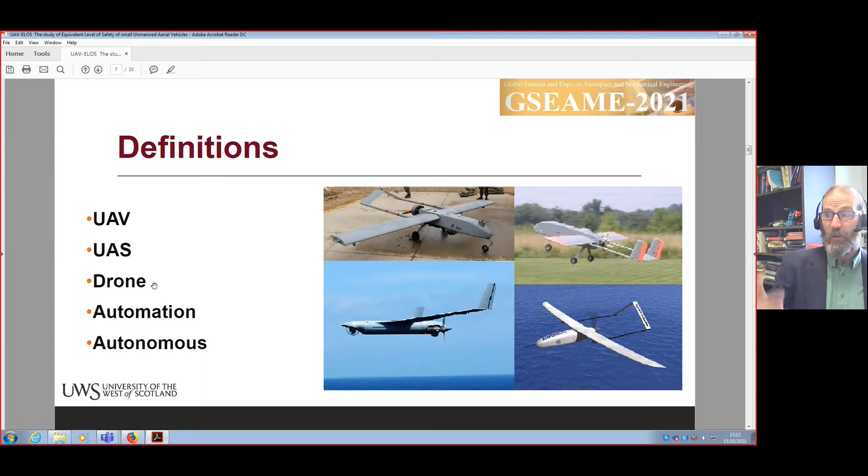But then if you have varying conditions, things which may arise, perturbations, unaware situations which may impact the missions, which the program doesn't know, but the system should adapt to it. This is what we call autonomous operations. The system has to finish the mission and has to cope with the problems which arise. Okay, and that's where autonomy starts to work.

The regulations with UAV started in 1944 at the Chicago Convention, where we call that no pilot on board. Here's the quote: No aircraft capable of being flown without a pilot shall be flown without a pilot over the territory of a contracting state without special authorizations by that state and in accordance with the terms of such authorization. Which means that if you're not piloted, you need a special authority to grant you the right to do this.

We have to worry about the sensors and all the overall system, which is not just technologies, so that we may have inadequate detect, sense, and avoid technologies and algorithms which may impact the capacity of this to perform a mission without any danger to people and assets. Limited operator situational awareness is one of the issues. When you're flying these small vehicles, the person that is flying them on the remote control will lose sight of them.

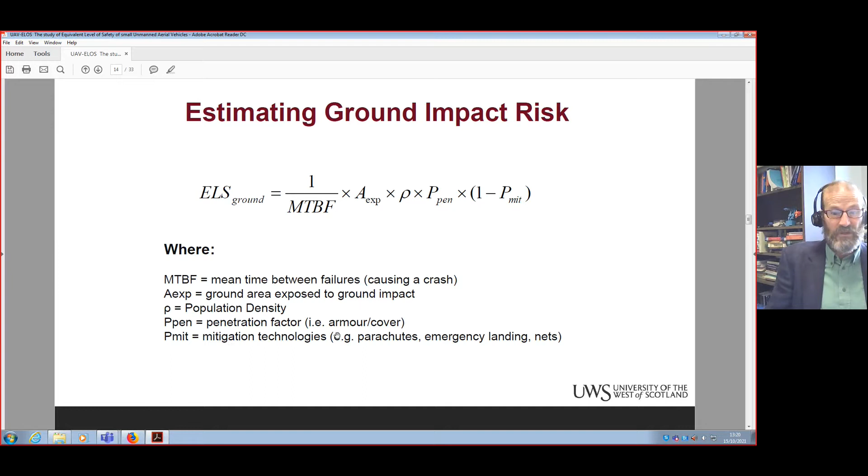Population density is the amount of people you see over a surface space, in cities, on farmlands, or over open areas. It could include the Arctic, for example. Penetration factor means how hard this thing is, how strong it is, how likely it is to create damage if it hits anything. The mitigation technologies: do we have anything on the drone that, if something goes wrong, could help save the day, like parachutes, emergency landing units, or even nets? We're operating with nets, so we could just net it out.

Here's the estimated ground impact risk according to our tests and evaluations using that function. Here we have different places related to Canada and especially Newfoundland. The lowest part is Labrador. Labrador is like some islands or parts of Scandinavia which are extremely low densely populated, meaning you have almost nobody per square kilometer. So these are the levels of risk that you find there. And then there is Newfoundland and Labrador together, the population divided by the space it covers. When you know how sizable Labrador and Newfoundland are, it makes a big space and gives you an idea of the risks which exist.

And then you have the island of Newfoundland itself, which has a lot more people, because there's about 5,000 people in Labrador and about 500,000 people in Newfoundland. Then you go to the next step: here we have Newfoundland, and here we have the Greater Toronto area, or you could say Greater Montreal or Greater Vancouver. These cities are similar in terms of size and population density, and depending on population, this gives you this curve.

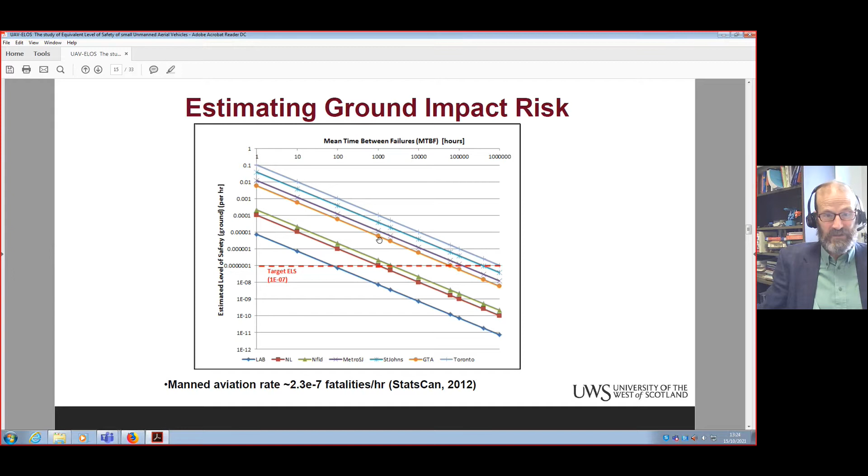So this gives you, for 1,000 hours mean time between failure, which is reasonable for most of the small UAVs, these are the values you will obtain there. So you would be only able to fly them over Labrador and Newfoundland and Labrador. But then Newfoundland itself, when you start considering Newfoundland, starts to be an issue. Definitely not over cities. Okay, so this gives you a good idea.

So now we have an estimated mid-air collision probability, which is very essential. Okay, so we have the one for the ground and we have the one for mid-air. And that's another one when we fly over. Well, we have P-enc, which is the probability that an aircraft will encounter another, related to air traffic density. Pmac is the result of that multiple factor. That factor is air traffic density. You can have data for that. It's all recorded according to where you fly.

If you are in a zone, and depending on the altitudes, if you're cruising at 12,000 meters and you're over Glasgow, well, you're going to have all the European aircraft flying from Europe's capitals to North American ones, and even further. So you're going to have to be careful where you fly, because these values may change according to statistics. Probability that loss of separation occurs, okay? And then, of course, this also can increase the likeliness of an accident if this thing is lower, depending on the equipment that you have there.

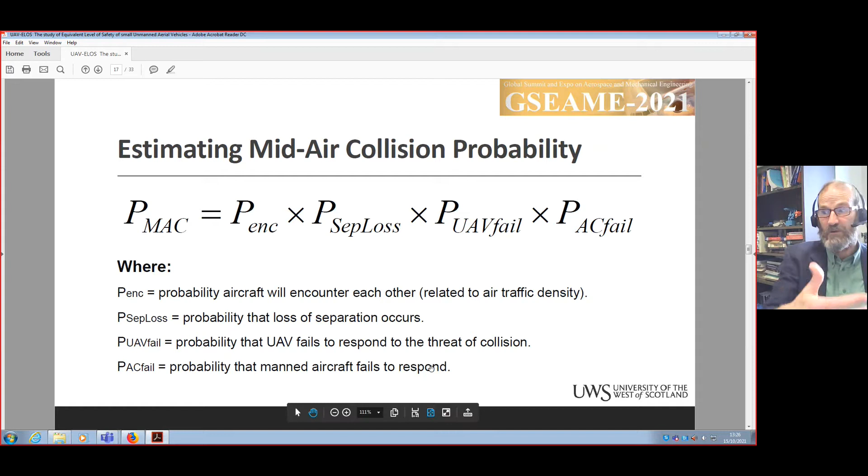A probability that UAV fails to respond to the threat of collision, and probability that manned aircraft fails to respond. Here, we have one about manned aircraft. That means that when we have a UAV versus another UAV, we can evaluate that very precisely. But then the probability of a flying Boeing or Airbus being capable of detecting my small UAV is going to be put there. It may not be able to respond to the likeliness of an occurrence of small UAVs. So you put that in there. So there's different aspects to take into consideration.

And the P-enc here needs to be further examined according to airspace. I'm not going to review all airspaces because some of them are forbidden and are very difficult to approach. But the one of interest is the G airspace, which is general aviation airspace, or G class. And then we define an area, we define an altitude H, and we have a UAV path evolving on that path there at a certain altitude. They may have a certain thickness of altitudes, but normally we operate at a constant altitude.

So it's going to be N divided by V class multiplied by V trans. N is the number of aircraft present in the airspace. And again, this is data that can be obtained from statistics. V-trans is the selected value depending on if we choose MAC or NMAC. MAC means a 10 meter diameter around the UAV, and NMAC is a 300 meter diameter defined around the UAV. So this P-enc may define if we're concerned about MAC or NMAC swept through.

Okay, V class is the diameters of G class airspace up to 2,200 feet or 670 meters. Okay, and that's the type of volume we evolve in.

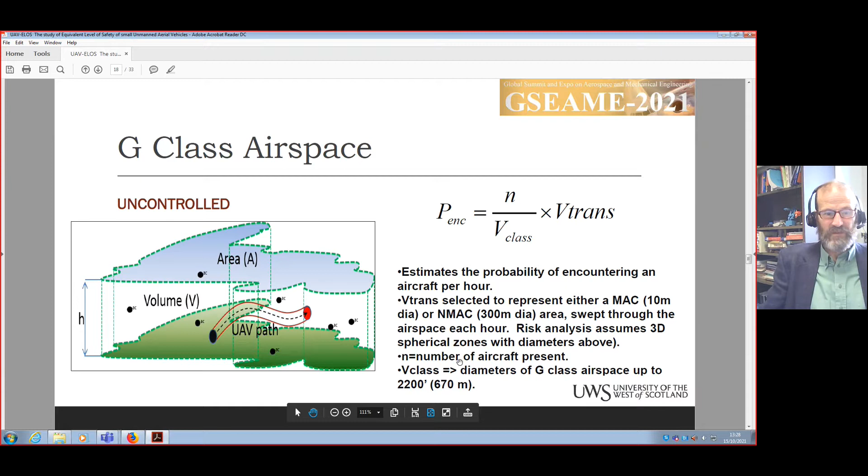Okay, and now we can go near airports, and we have C and D class airspace. Some airports are the densely populated airports and the low density airports, which are still an issue because you are having small aircrafts, but you still need to worry about that. So the only difference is we are going to introduce a new term multiplied here, time spent in the zone in an area where we have the likeliness of encountering N aircrafts in that zone. Again, statistical data according to time of the day and everything.

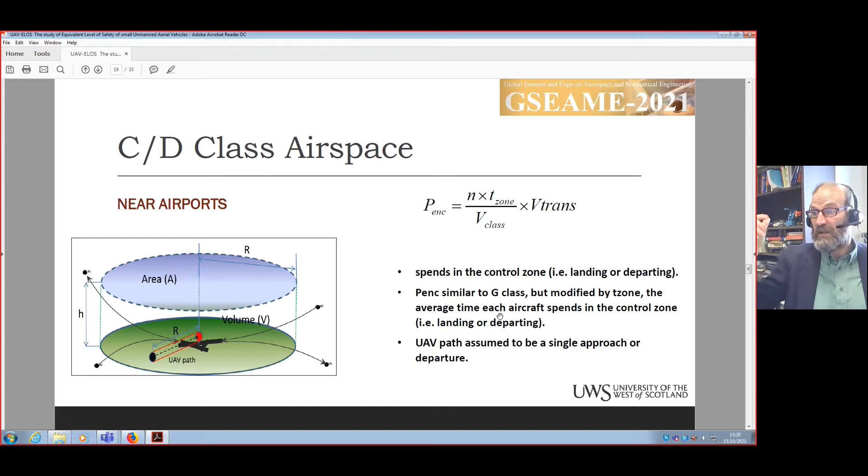If you're passing over an airport at, let's say, 5,000 feet, well, you are 1,500 meters. If it's 2 o'clock over Glasgow Airport, at this time of the day, N will be a certain value. That's recorded. And then the time it takes for your aircraft to go through the zone at the cruising speed, 150 kilometers an hour, over that space, that radius there, you can calculate very quickly all these values and then have an idea of the P-ENC.

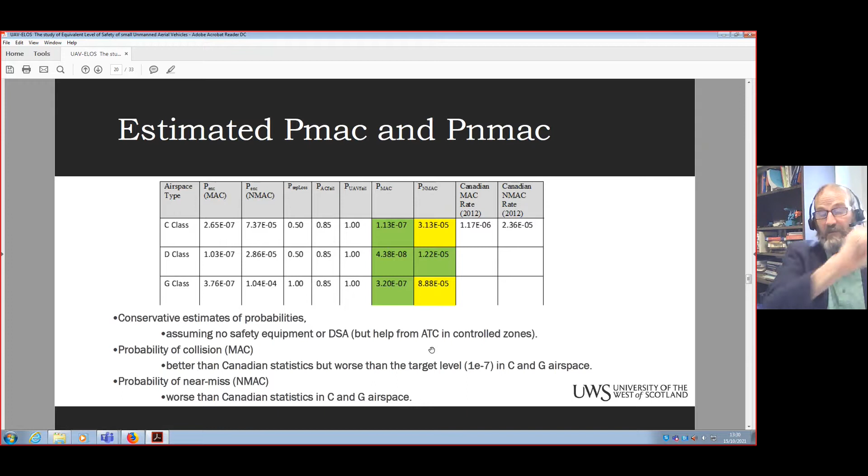Conservative estimates of probabilities, assuming no safety equipment or DSA, but help from ATC in controlled zones. So you could have air traffic control, which may help unmanned aircraft in certain zones, especially the C and D zones. So the air traffic control is going to relay the information to the manned aircraft to say, you got the 3 drones in the area and they are here, because he's aware of it, because there's maybe instruments in the drone to relay the information, and the guy in the control tower is going to make sure they relay the information.

Okay, enhancing control and situation awareness. Well, we have that possible. We have ways to achieve that. So first of all, there's manual control, the classic stuff that we see in every aviation club or the RC clubs, and the way small operations of UAVs are done, for example, in cinema, they will use manual radio control methods with small UAVs.

So you have a flight console similar to a dual pilot cockpit using a forward fixed camera view on the aircraft, on the UAVs, and it's what the military use, and they have big screens to relay that camera information. In our case, we have a small screen to relay the information to.

You can even have simulation aspects. You can have things shown inside, which are known to be there anyway from the simulation information. Okay, it goes up to a certain degree of safety, but you know, as soon as you have a distance from the UAV, it becomes difficult.

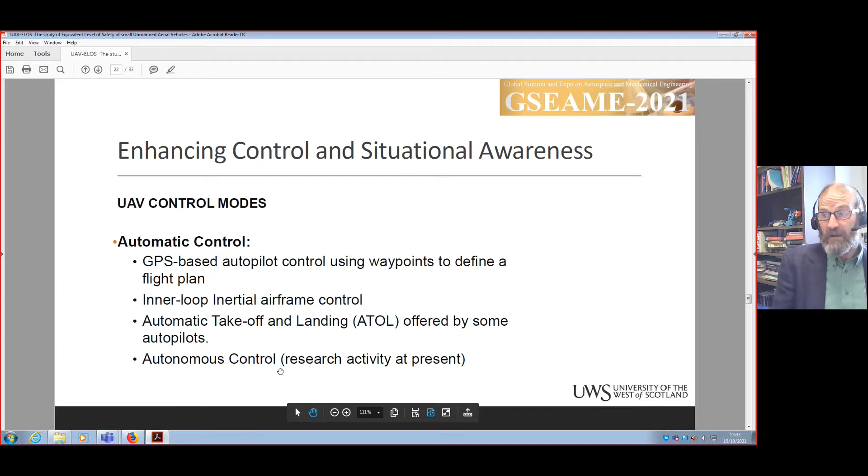But the military does it. Military do these things, but in the civil operations, we're not. We're not allowed to do it anyway, not yet. So we have to improve everything we do.

So remote control is you have a person with a remote control unit transmitting radio data to, like here, an Aerosonde, and you're getting information from its pose, so position and orientations, your pitch and roll, and you're getting it back. And you have an elevation at which you are going to see, so that's your line of sight. You have a range, which is the distance on the ground, the altitude, which is the vertical distance. So line of sight is going to give you, with the information, an idea where it's going.

The pilot can only manage up to 8 variables at one time from a remote perspective. Otherwise, it's sensory overload from a human perspective. At extreme range, we have poor visibility and it's almost impossible. In odd orientations, control becomes difficult. Imagine it's not facing in the same heading as yours, then it becomes very, very hard.

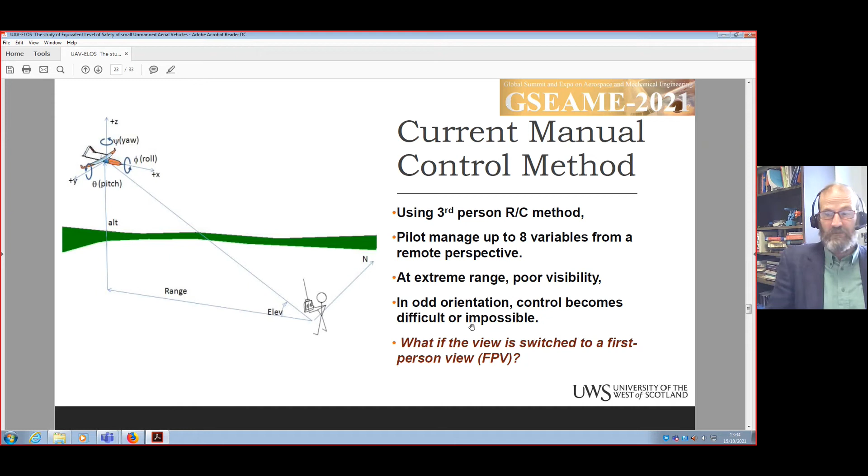What if the view is switched to a first-person view? Well, we could use a first-person view with a screen or a big screen or even an overhead display. Then we can measure that and see the different ways. So the ones in blue here are the result for remote control from the side with a distant view, the flight simulator type of thing, with enhanced screen information coming from the camera in the aircraft giving you a vision, and then VR goggles. So you improve that by putting that right on your eyes so you're not having any impact from the surroundings.

Okay, so we have two ways to measure that. So we had the landing strip. We got an expert and a rookie to land the aircraft, the Aerosonde or the giant Big Stick, and we landed that on an airstrip, which was a former military airstrip. So it's a massive one, a huge one with quite a bit of width, 40 meters by a bunch of kilometers.

Here's the precision of the 3 modes. Precision meaning in terms of landing distance. So are we having a short landing or a long landing? Are we having a deviation from the center line, which we try to target? In windy conditions on top, on a calm day below. And this is data we've obtained through thousands of tests. Well, there's only a few there, but we did many tests on those things. So landing, touchdown on a calm day. So you see the spread of the different techniques there.

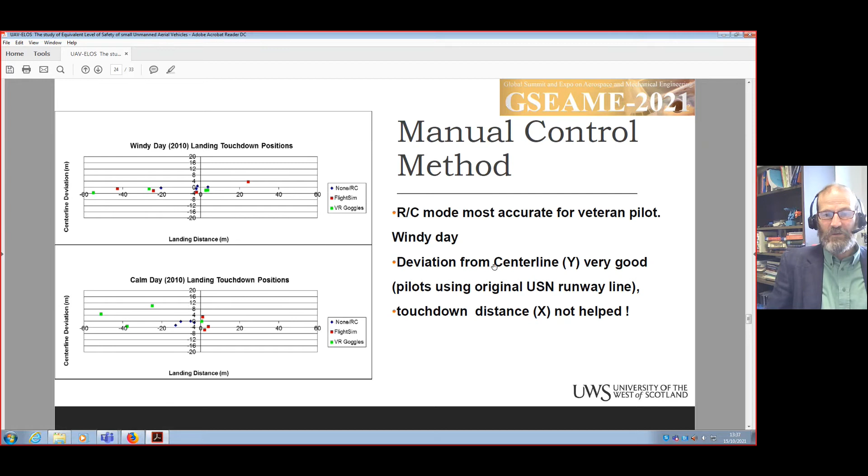On the windy day, deviations from the centerline Y is very good. Touchdown distance is not helped. RC mode is most accurate for the veteran pilot. On a calm day, it's worse than a windy day, actually. We're not doing better, especially the VR mode, and it faces problems with the FS mode setup. So there's issues there that happen.

Evidence of large blocking effect, depending on the 2 different days. So there are different things that could make you block access to information and have a good appreciation of things. And some other factors may be affecting, like the glare. Like you can see, a flashy sun can erase the features and the possibility to have information and actually identify objects and to be precise about things.

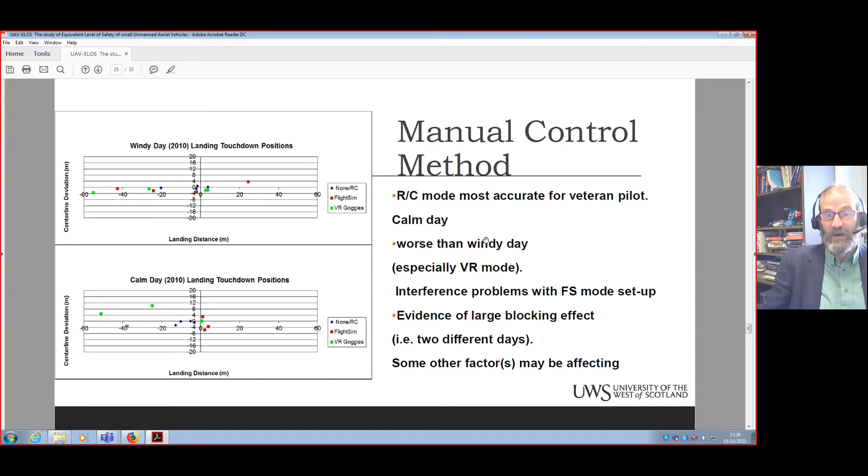VR, well, this is the stuff we use there. So this is when you are using a HUD display or when you're using the one on the screen on top, or if it's overhead display. And this is the giant big stick that we use there with the camera on top here. And this is the image.

So if we use FPV methods, the accuracy has been improved. The VR mode now is the best method on the proper runway. If you combine landing touchdown positions in 2013 with better systems that we have here, the VR mode is now the best. The FS mode method has improved the centerline deviation, but still long landing. So we're overshooting on the landings.

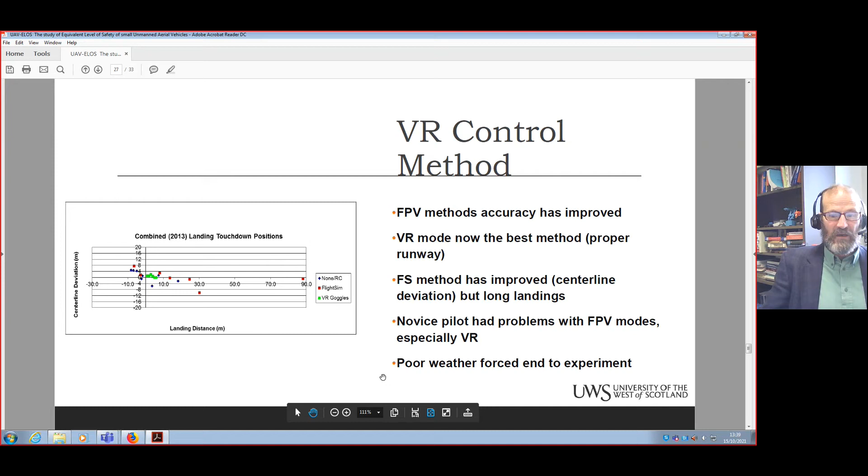The novice pilot had a lot of problems with the FPV modes and especially the virtual reality ones. And the poor weather forced us to end the experiments a lot of times, and that's one of the things: we want to be able to operate UAVs in bad weather, but still, depending on the quality of the machine there, we may be in trouble. So then we have to be talking about enhancing visibility, and there is an issue of daytime, and there is an issue of nighttime.

So the human eyesight is affected by the background luminosity. As you can see, if it's a sunny day, it's going to be glaring, and I'm not going to see the details in the background. I'm not seeing what is happening on the wall there. It's blurred. I've seen that with vehicles that had cameras in the back or in the front. Depending where the sun is, you can have issues. So autonomy could be affected by this.

So contrast during daytime is difficult to obtain. Depending on the weather conditions, overcast clouds allow you to have sometimes better, but don't be too close to the clouds and don't have them too gray. If it starts to rain, that starts to be a problem with luminosity. The detection limit is about 20 to 30 arc seconds. And if you want to distinguish shapes, you need 4 to 5 arc minutes. So when you go further, it's going to be bigger. Otherwise, smaller objects, impossible.

Normal human capacity for visuals is 200 degrees because you can turn your head, 135 degrees elevation. High-res vision is limited to only plus or minus 15 degrees. So for small UAVs, a human is unlikely to spot beyond 500 meters range, and only in the narrow FOV with maximum acuity. Without glasses, much worse. Good glasses, good conditions, good weather, good everything, 500 meters range to detect a small UAV.

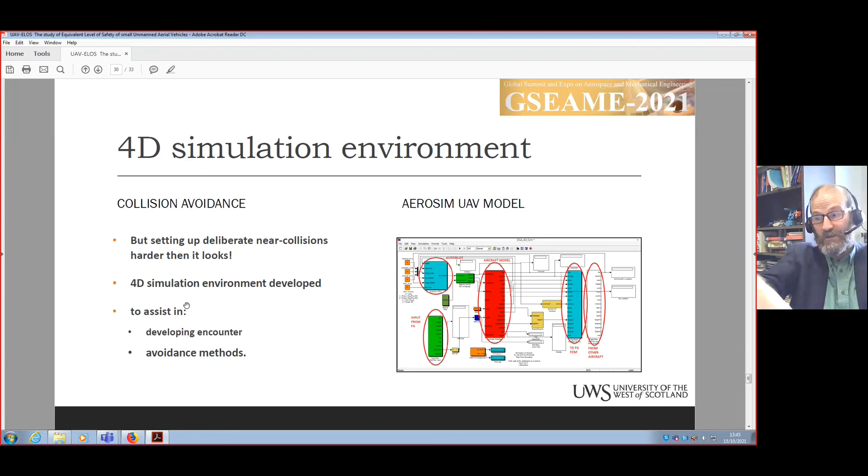And then you're going to have to show that you can send two simulated aircraft on a collision course, which is not that easy to obtain. So you have to prove that in your simulation model of the dynamics of the aircraft. And then on top of that, you have to put your control strategy that is going to show that it can avoid the crash. That's more complex. These are interception and avoidance strategies which are used and which we examine in our PhD theses, my students, and we have different types of maneuvers which are tried.

And remember, the UAV is a small aircraft, is not seen by the bigger aircraft, so the pressure is on the UAV. The UAV, by rule, should not crash into another aircraft. Period. If it crashes, that's its fault. Well, the pilot did this and that. That's your fault. You should avoid at all costs because you've got 300 people in that aircraft. So whatever the pilot did, it's the UAV's fault, and that should remain that way.

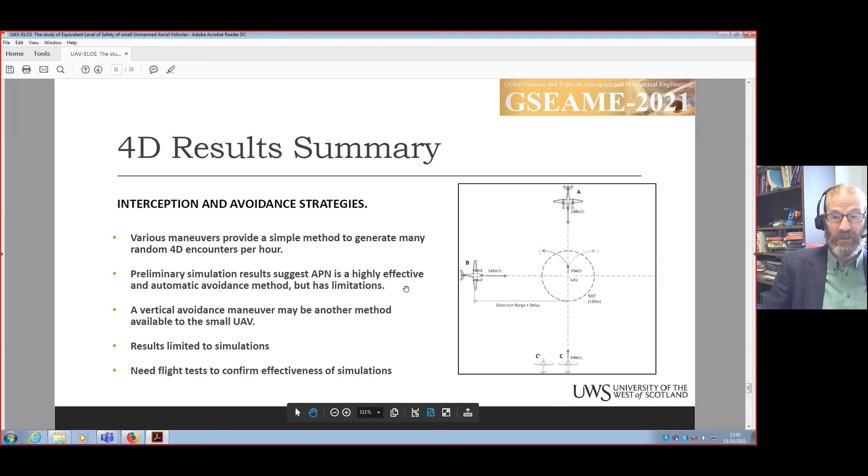So in conclusion, what we have here is the current estimated level of safety of small UAVs. Realistically, we will have to improve the small UAV systems, designs, construction, because they are quite cheaply designed at the moment. And if you really want to have something, we may decide to have GA level quality of design. So it should be designed as good as a Beechcraft, or we could even try to match the qualities of airliners like Bombardier, Embraer, Airbus or Boeing, but this is another issue.

So at least we should claim ELOS with a GA aircraft. We should be as good as them versus the risk to people and property on the ground. So that's the main thing. We want them to be comparable in terms of level of safety to GA aircraft, period. The small UAV should be restricted to very sparsely populated areas for the moment because they're not reliable and good enough to be flying over our cities, over densely populated areas, or special assets like power lines or nuclear reactors, or even we have to be away, not too close to stations there.

Okay, the small UAV does represent a slightly higher near miss risk in class C, and the mid-air collision risk does not meet the goal value that we wish to reach in terms of flight hours per accident in class C and G airspace, and is 4 times the risk in class G airspace for near miss cases. Okay, so there is MAC and NMAC. For NMAC, we could try to do that, but MAC, we have to meet it. So there's no point there.